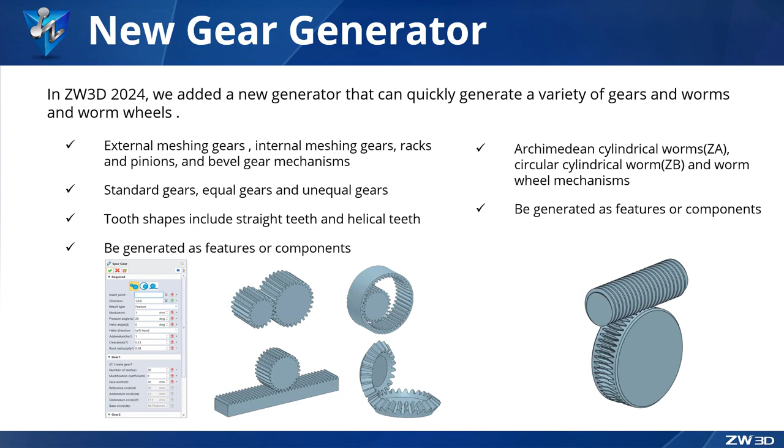New gear generator. In ZW3D 2024, we added a new generator that can quickly generate a variety of gears and worm wheels, and they can be generated as features or components.

Take the external meshing gears as an example. You can set gear parameters such as direction, modulus, pressure angle, and helix angle, and choose whether to generate as a feature or component. Switch to component here.

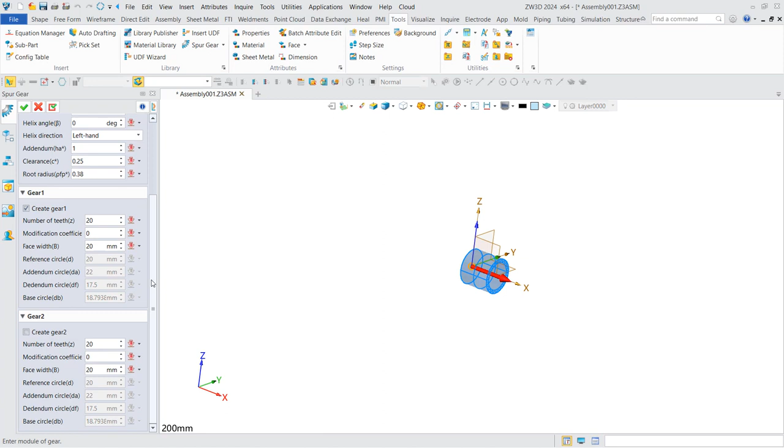Choose whether to generate a single or double gear. Check Gear 2 here to generate a double gear. And set the tooth number, modification coefficient, and tooth face width.

Then you can see the gear mechanism generated. Meanwhile, the gear node generated can be seen in the assembly management.

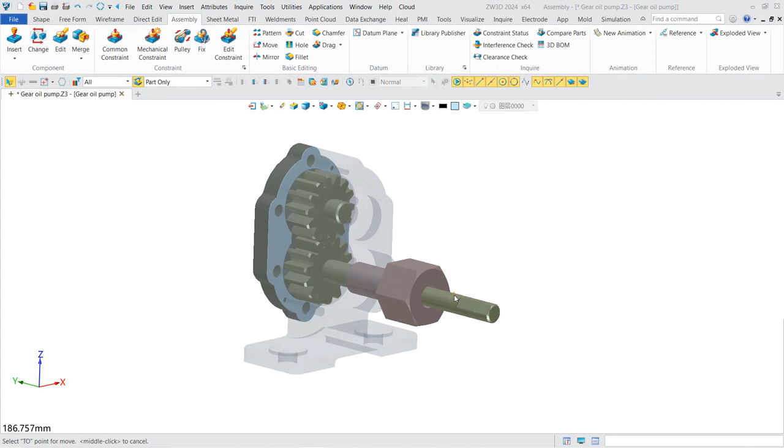Using spur gear can also generate internal meshing gears, racks and pinions. This is a bevel gear.

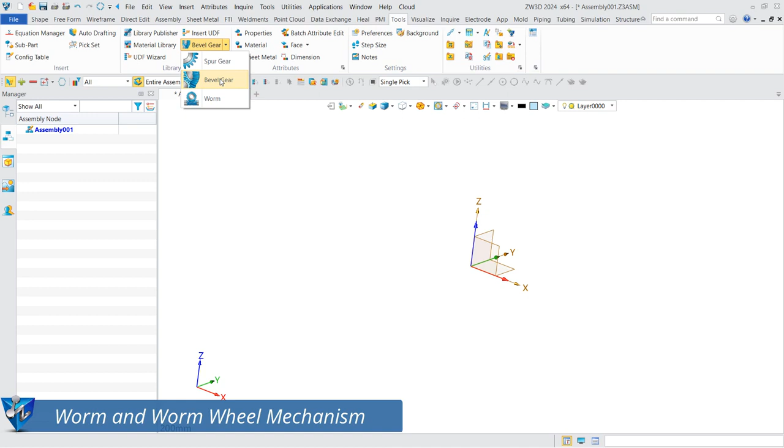The required mechanism can be generated using the worm and worm wheel generator. In the dialog box, set the result type as component. Set the insertion point, direction, modulus, pressure angle, and other parameters.

Set the worm type as ZA or ZB. And set the number of head, worm length, reference circle, etc.

Check Create Worm Wheel to generate a worm wheel. Set the tooth number, modification coefficient, and face width of worm wheel.

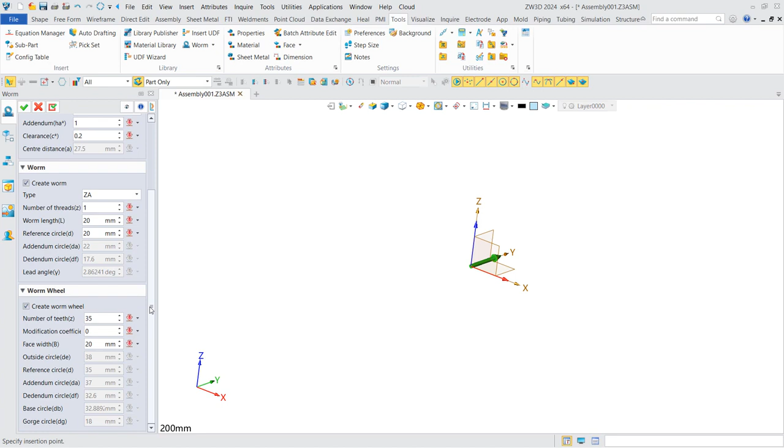After that, the worm and worm wheel mechanism is generated, and the corresponding node is generated in the assembly management.

The new gear generator in ZW3D 2024 helps engineers to quickly generate the required mechanisms of gears, worms and worm wheels.